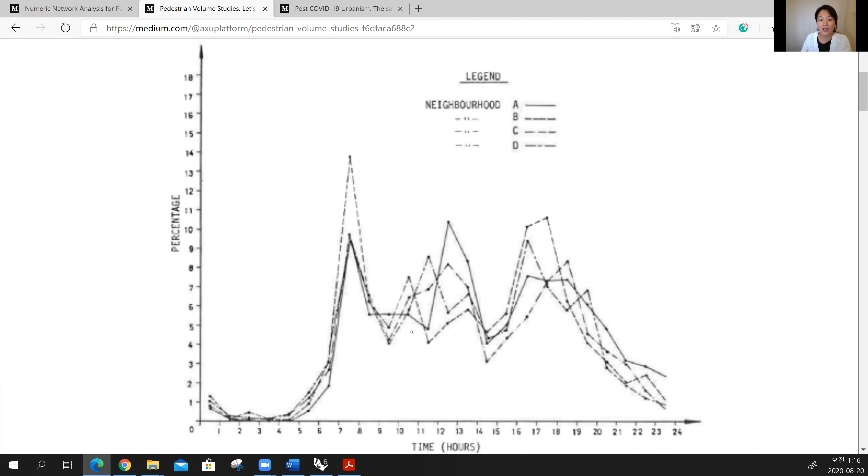For example, if you see this graph, there's a pattern here. This is manually counted pedestrian movement in 4 different neighborhoods, and each has a slightly different pattern. You can see the morning peak hour is around 7 to 9 a.m., the afternoon peak hour from noon to 3 p.m., and the evening peak hour from around 6 to 8 or 9 p.m.

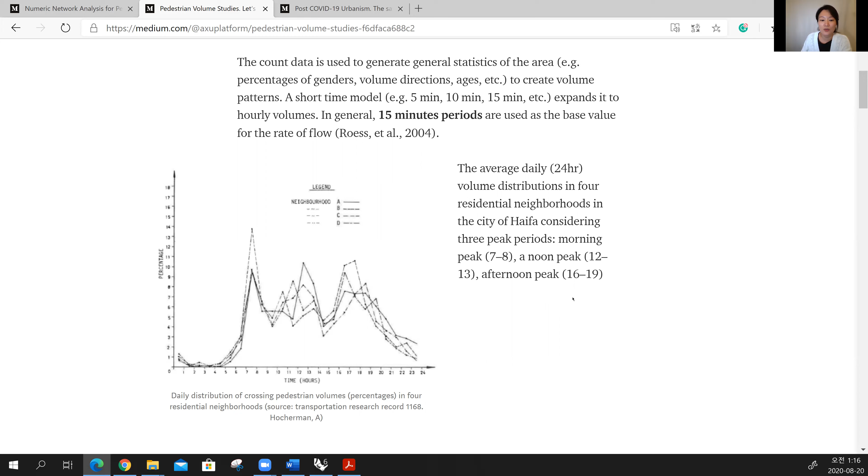So this reflects our movement patterns in cities. Normally researchers and transportation planners do this daily volume distribution counting exercise for each city to understand how residents actually use the city.

Also, if you see this diagram, depending on the land use type, it shows a different pedestrian flow pattern.

If you are in an office area, there will be this kind of 3-part pattern. If you're in recreational places such as a park or open public space, it will show just one hump in the graph. But if you're in a residential area, it usually shows a 2-peak graph.

But it's understandable, right? In the morning peak hour, people go to work or school, and in the evening peak hour, people come back home. So depending on the land use type, the graph pattern will show differently.

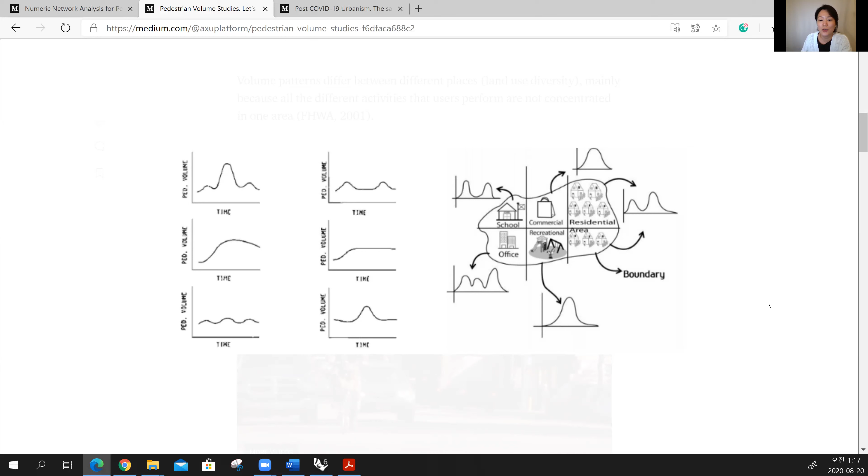I will show you some videos to explain the way of counting. The first one is about manual counting.

As you can see, it's literally just bringing a paper, a tally paper, and counting at the corner of a street. Unit 2 will do this kind of similar exercise at our research site, which will be Hangang River Park. I prepared the file today, so I will show you how to do it later with the NNA toolbox.

The second way is automatic counting using a sensor. There's a sensor machine that people install, and if bicyclists or pedestrians pass by this sensor machine, it automatically counts them.

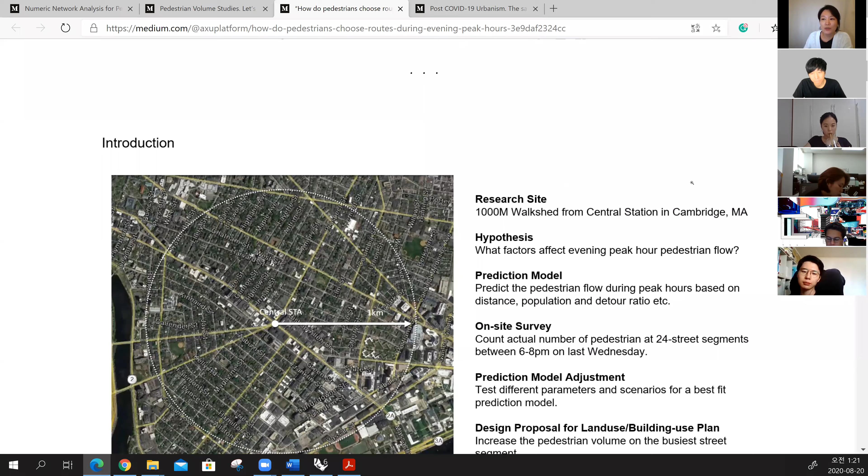What we want to do is collect the peak hour pedestrian activity around the central station area with an on-site survey, and also do computed accessibility analysis, then compare both and find linear regression results to see how close the two are. Our research site is Cambridge, and our hypothesis concerns what factors affect evening peak hour pedestrian flows. We build a prediction model, do an on-site survey, and adjust the prediction model using the survey data and computed model. Lastly, we propose a design proposal for new land use and building use plan.

We decided on 9 different hypotheses for the site. The first is distance - the shortest route from somewhere to the metro station - and also density, land use type, road hierarchy, road type, road safety, living frontage, sidewalk condition, and green space or amenity. Among these 9 hypotheses, we thought 3 things in particular - distance, density, and land use - are the key elements influencing pedestrian volume on the site, so we focused on these 3.

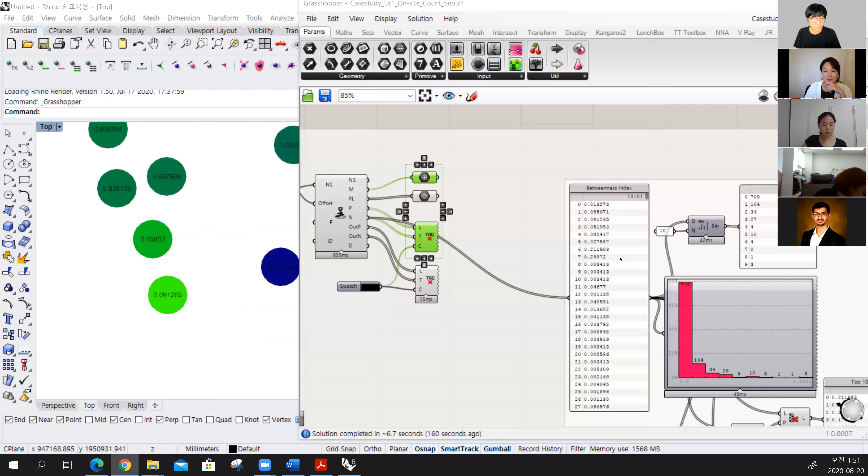Here you can see the betweenness index results, like you can see 0.006. For example, if you want to examine a place, you want to examine this location, what you should do is record like 0.091. You write it down here, then you can decide what the street number and count is there, and multiply it.

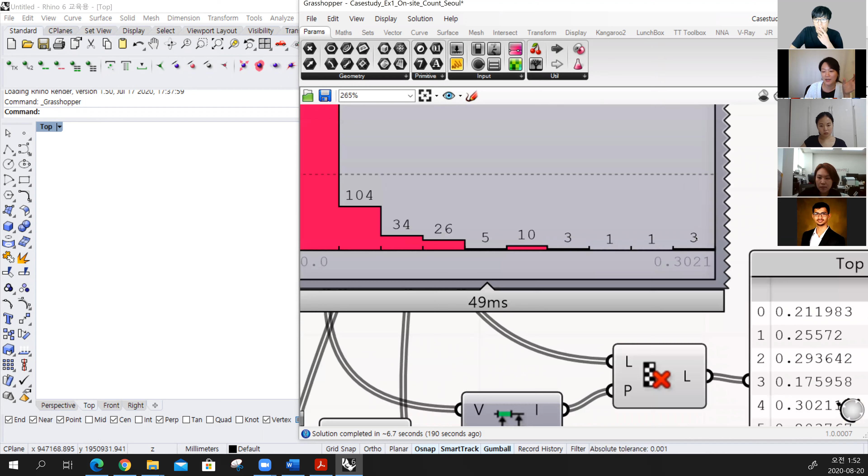That's the progress, and from here you can understand the result of the data. The bin graph shows what is the top 10% value and what is the bottom 10% value. You can control this domain and define the value range. Here you can see the top 10% value is 0.3 something, almost close to this. So you can control this range and quickly get a sense of which number is the top percent and which is the bottom percent.

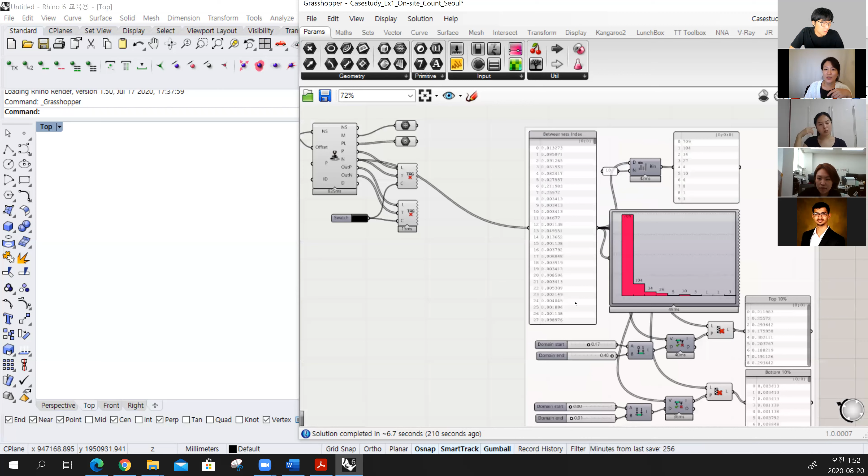We're going to share this file, so please check it out, and if you have any questions, bring them to our workshop session. Lastly, you don't need to just do the betweenness analysis. You can also do other analyses like centrality analysis or accessibility analysis, and decide which point you want to calculate the pedestrian flow for. Just bring your hypothesis and idea, and talk with us.

And lastly, we'll quickly talk about the COVID-19 urbanism issues. It's kind of the new normal these days, right? Many people are concerned about it, particularly in the United States we're having a really tough time. So in Cambridge, new regulations are already applied in our life.

For example, this was a car road, but it became a shared street, so cars cannot access here. At certain times, only bicycles and pedestrians can use this street. Of course, the layout of the pedestrian street is different, like food pickup zones, and the layout of restaurants has changed, like outdoor dining and outdoor tables, which is common in the US now. Also, the direction of walking is already defined for public spaces, so we can only walk one way.

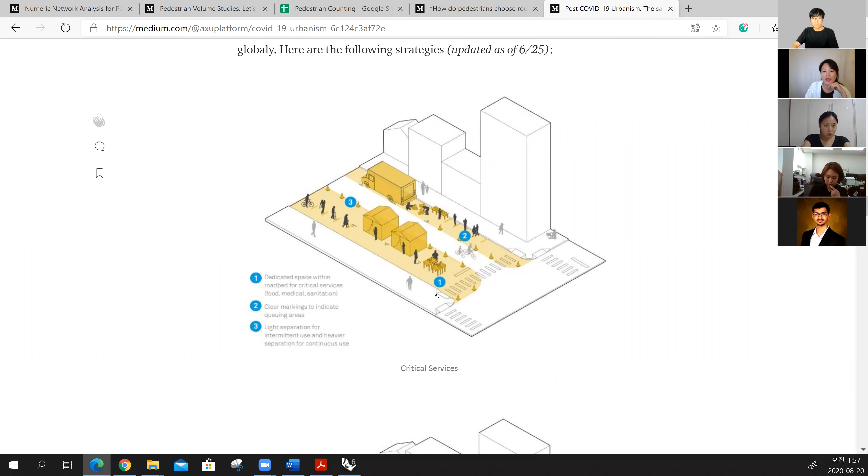And here is the design guidelines for COVID-19. This guideline comes from the National Association of City Transportation Officials. They focus on public spaces rules and provided 12 different situations, like critical services. They transform streets into these critical service places.

And this is managing speed. So instead of just a straight street, they make a curve and give space for pedestrians, and cars should reduce their speed during this curve.

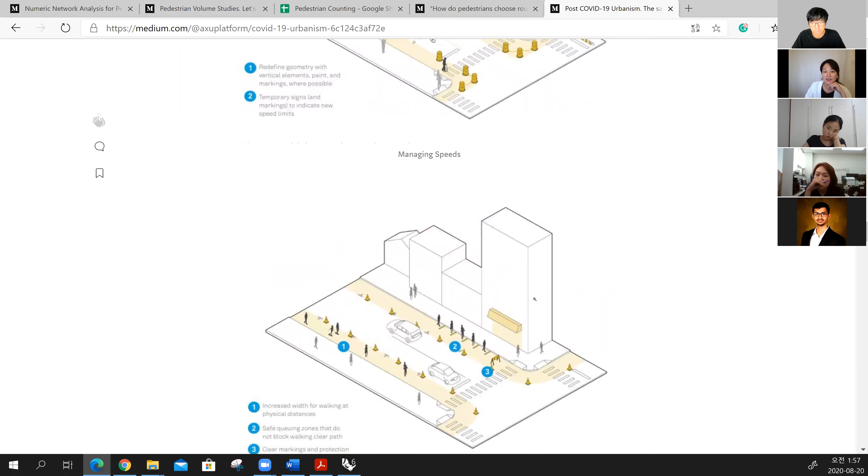And sidewalk extension, and this wide street, how they can design the corner of the street. And they just make it a shared street, and they make an open play street.

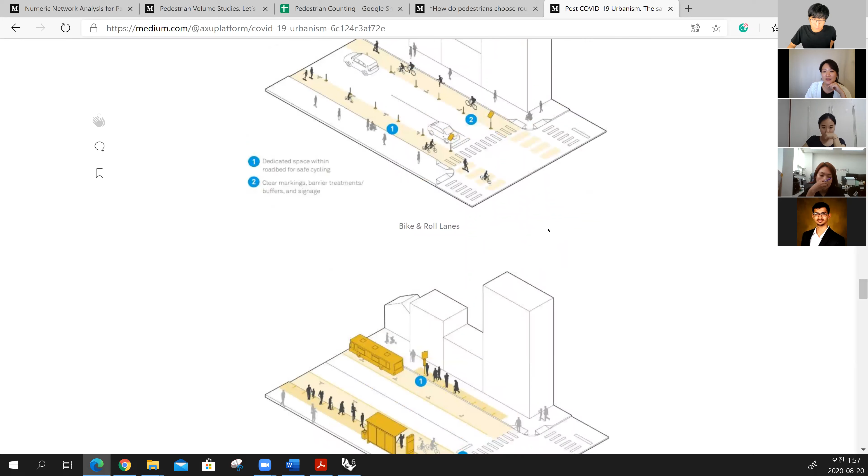And they expand to bicycles and bus stations, and bus stops with other multi-transit nodes. Yeah, they just want to make a slow street.

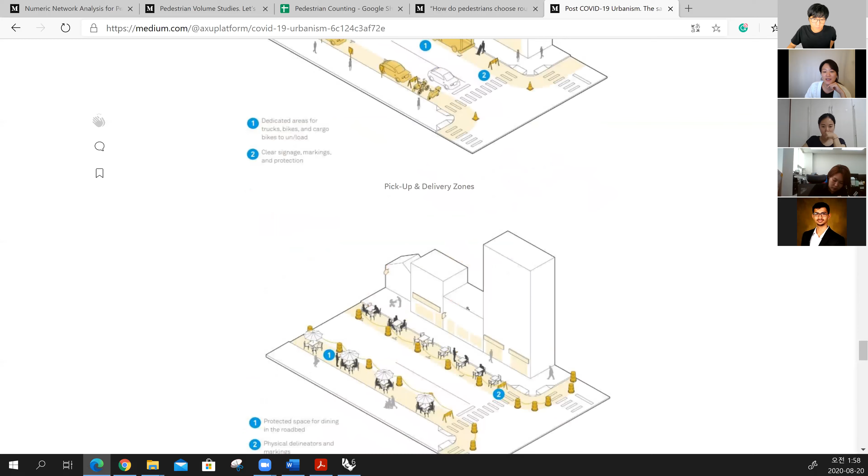Pickup zone, this is very popular in the US now, and outdoor dining, and farmers market. And for protests, even for protests, and for school, and some open outdoor events.

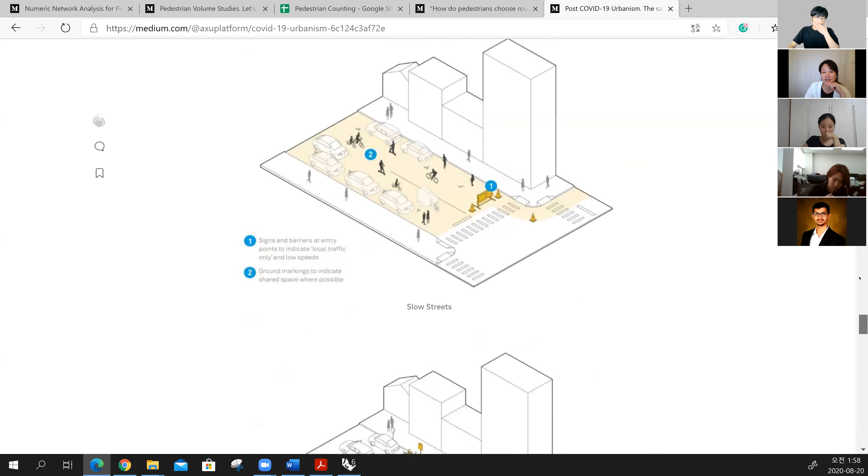So please check my Medium, I created a link there so you can download the whole report of this guideline. It's so interesting, you can just read it.

So I provided all the links for these files and data. Please visit and check it, use it for your research ideas. So that's it, it's done for today's lecture, and let's have some Q&A time.